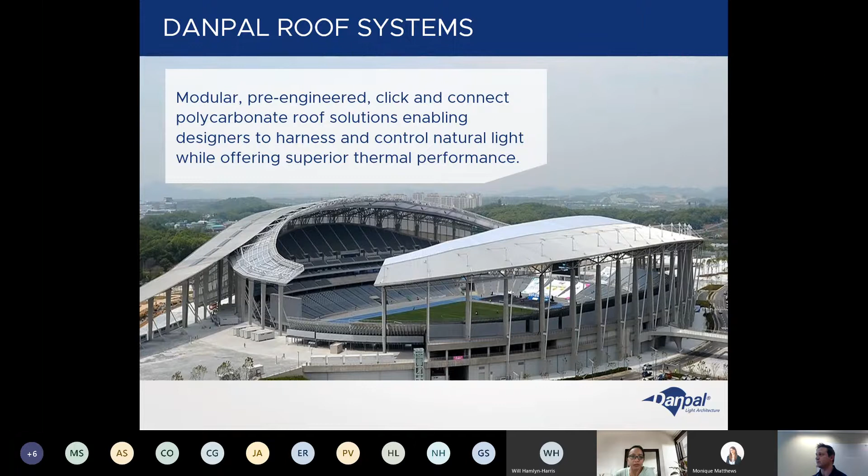I'll just move on. You'll see the photo there of a stadium. We do a wide range of projects, anything from super large projects like stadiums down through to awnings in backyards or pergolas of residences around Australia.

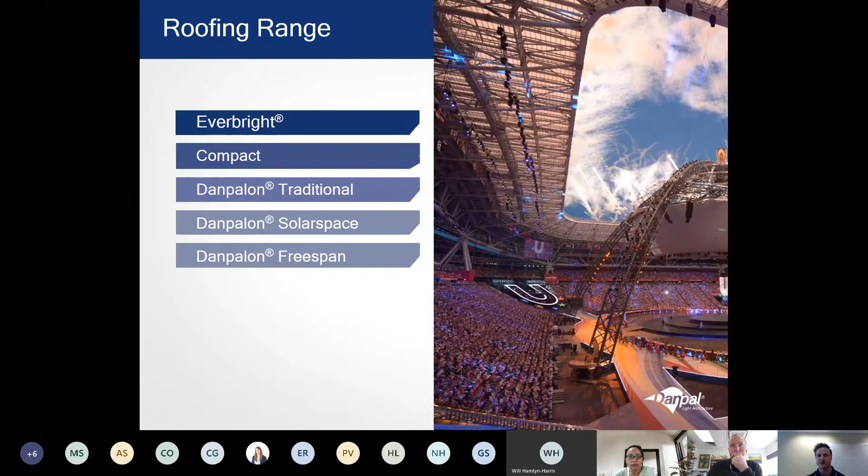Just a quick overview of the roofing range we have listed with yourselves. We've got a couple of products, really three very different solutions: Everbright, which is a tube system; Compact, which is a solid panel offering; and our Danpalon panels, which are the multi-cell extruded polycarbonate panels. There's a few different systems that go along with that panel to achieve various spans and aesthetics, and we'll go through that. The three we've listed with yourselves at this point: our traditional system, our Solarspace system, and our Freespan system.

Jumping straight into Everbright, you'll see from the render image that Everbright is a tubular system. It's an extruded tube, 100 mil wide by 75 mil thick, with 3 layers of polycarbonate through it, and is probably the strongest polycarbonate roofing system you'll be able to find. It's also used for walls, as you'll see in that photo to the right, but we'll cover walls and facades in a separate presentation.

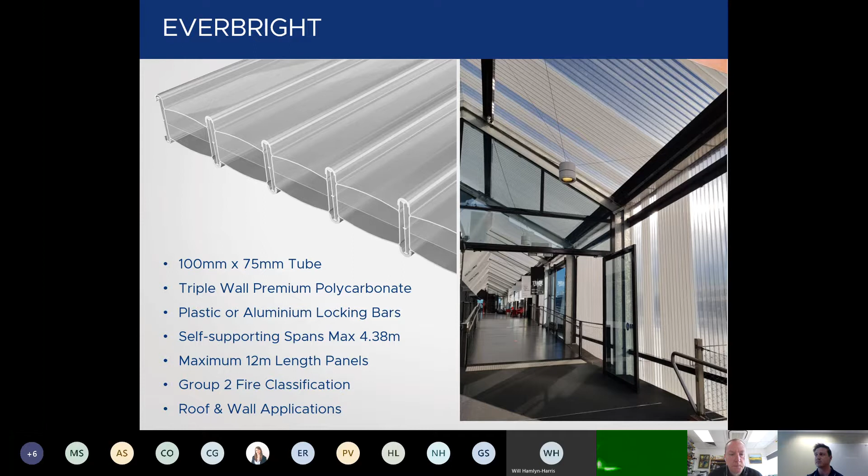What's unique about Everbright is that it doesn't use any visible or external framework or support. It uses what we call a locking bar that sits between each of the tubes, and that locking bar gives it the ability to span a certain distance depending on how many locking bars are in the configuration—anything from one aluminium locking bar, or even none, per 6 joins, through to 5 locking bars per 6 joins. We stock these tubes in 12-meter lengths. They're very rigid but can be curved. These achieve a Group 2 fire classification, and as mentioned, there are both roof and wall applications.

So just a quick look at the technical properties here.

You'll see the tube obviously just interlocks, and then there's a locking bar that sits in between that ensures the tubes are connected sufficiently to ensure they don't disengage. It's then simply fixed through that joining profile into the substructure at the various maximum span distances, which are in the span table to the bottom left.

Just quickly, we stock this product in four colors, and each color has its own light transmission as well as SHGC values. I'm sure you're familiar with SHGC, the solar heat gain coefficient, very common in glazing and windows. You can convert that U value, which is just below there, the thermal properties, a U value as standard.

We've got a few options to increase the thermal performance by inserting either what we call polycool inserts into each tube, or nanogel into one or both cells. You'll see that U value with 2 cells of nanogel down at 0.18 is incredibly good performance. In terms of an R value, that's the equivalent of 5.5 - an incredibly high performance in terms of the thermal aspect.

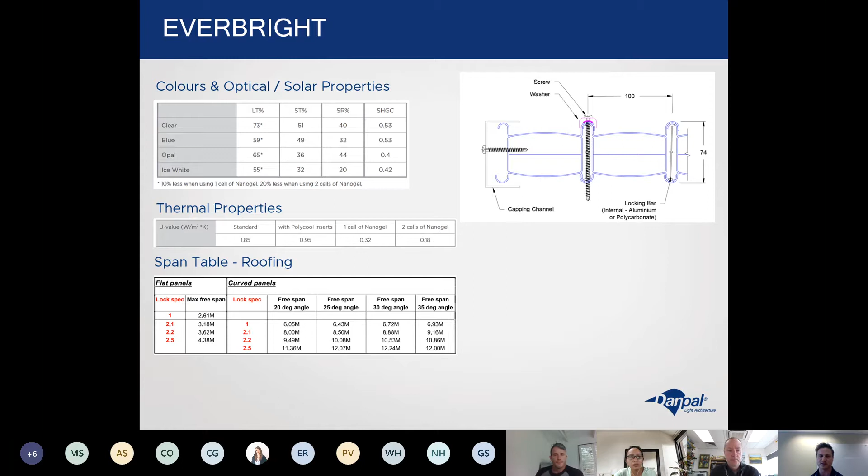Just a couple of photos so you can see what it looks like - obviously a very clean look. That photo on the left is from the Tasmania project, where it was all clear tubing. The ones that appear to be sort of opal or a little bit opalescent are actually filled with nanogel, and that was to achieve the appropriate thermal performance for that project.

You can see there in that awning sense, and the photo down the bottom is actually a covered outdoor learning area, which we'll see a lot of in schools. You'll see it's very minimal structure requirements, because the panel will span up to 4.38 meters in a flat sense.

Excuse me, Hein, just a question on that - are the panels trafficable?

They are, in terms of their ability to support the load. There is a standard, AS 1539 or AS 1563 I believe, which stipulates that any plastic or plastic-based product should be considered non-trafficable. So even though our system can support a trafficable load, really what you'd need to do is place a crawl board over the panels if you were going to access it. That crawl board would just sit over the panels and be supported by the internal structure. So it's a bit of a technicality, but as far as it physically being able to support somebody standing on it, or materials being placed on it, it is very rigid and can support loads.

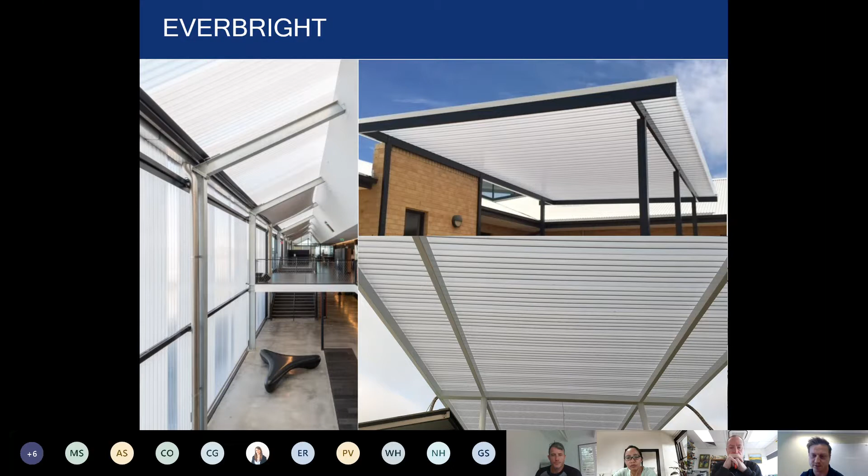The next system we have is Compact, so this is a solid polycarbonate panel. Obviously that offers that glass-like transparency. This offers probably the highest impact resistance, given that it is a solid polycarbonate panel. If you're not familiar with it, polycarbonate will offer impact resistance up to 250 times more than glass, and about 75 times more than acrylic materials.

We can achieve spans of up to 5.5 meters with this product. It entails using a structural glazing bar, or a free span bar as we call it, which you'll see on the next slide. We stock these in 12-meter lengths, but we can order them longer if required - so if you've got an awning or a roof that is 15 meters long, that's certainly something we can accommodate with a custom order. These achieve Group 1 fire classification.

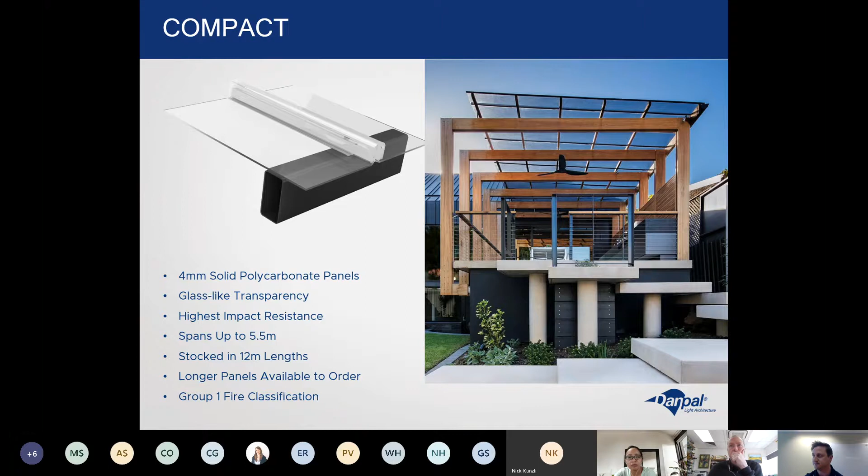And just some technical details there. So that just shows you the various spacer and glazing bar combinations. We'll obviously be able to provide these in our typical drawing set, but essentially what happens here is you've sort of got a system, the traditional up the top, that would tie into an existing or a substructure by others.

And then we've got other systems that will allow longer spans. So the glazing bar, you're getting a span of up to about 1600 millimeters. The structural glazing bar increases that to 2400, and with various size free span bars we can achieve up to 5.5 meters. Just some of the information there.

Obviously, being a solid clear panel, the U value is quite high. It's quite similar to glass in terms of its thermal performance, so a U value of 5.2. We recommend a slope of 5 degrees; the absolute minimum we would warrant is 3 degrees on this particular product.

We stock this in clear grey and reflective grey colours, and each of those colours has its associated SHGC and light transmission values, which will be available in the data sheets. I do have an optical and solar performance data sheet, which I can share with everybody straight away, that lists all the various colours. We have a list of colours that we offer from our library, essentially.

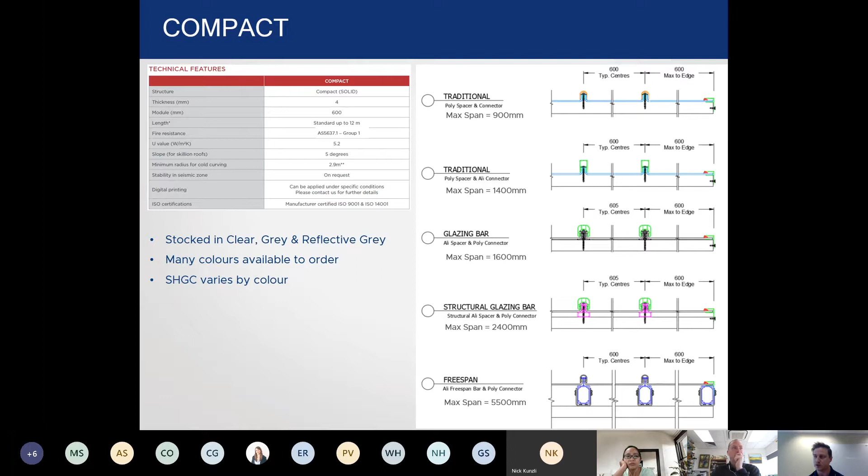So just moving on here again, just a couple of photos to show you what that looks like. We've got that curved application on the left there, using a free span bar, which minimizes any sort of other structure or purlins required. And then on the right hand side is basically just a rain screen for a town in WA called Manjimup.

The town wanted to protect their main shopping district from the weather. Obviously with the clear panel, it's still going to allow a fair bit of heat through, but it gives you that real clear and transparent effect.

Did anybody have any questions on that particular product?

Or again, with trafficability, there's a similar situation. You can support the loads by placing a crawl board on top, and that'll be supported by the connectors which hold the sheets together, and that eliminates any direct traffic onto the polycarbonate material itself.

Another reason you'd want to avoid standing on the polycarbonate directly is because you can scratch it, so certainly we wouldn't want people on dirty building sites, mud on their feet, climbing up and walking all over the roof, with stones on the bottom of their feet scratching the material. So while it can support that live load, we would advise against actually stepping directly on it anyway.

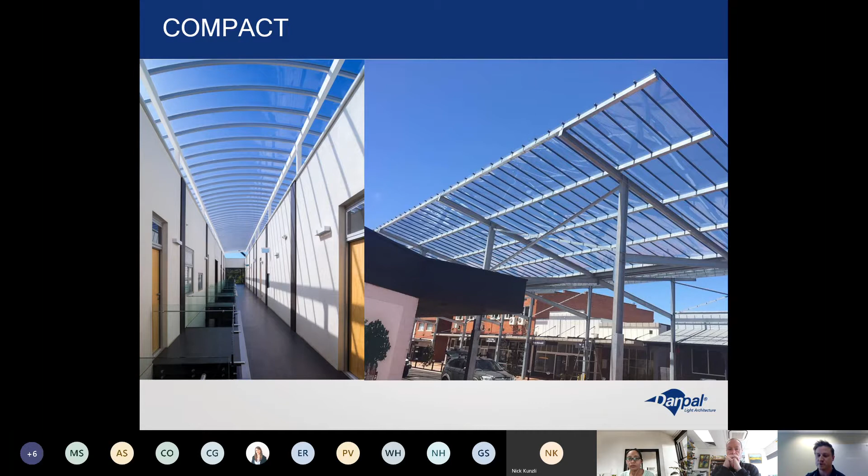All good to move on. I'll go to Danpal, as Will mentioned, that's what we were known for.

Danpal was distributed in Australia by various companies before Danpal, the parent company, set up shop here locally. About 3 or 4 years ago, Danpal, based in Israel, purchased 4 distributors in Australia - South Australia, New South Wales, Victoria and Queensland - and each of those became branches of Danpal Australia.

We're in New South Wales, we are the head office, and we have the majority of the stock holding, although each of those branches do have their own warehouse and hold some stock locally too.

So Danpal is the multi-cell or the extruded honeycomb panel, and basically these can be fixed straight down into a substructure that is designed by others, so either rafters or rafters and purlins appropriately spaced, in the sense of the traditional system. Or we offer structural systems in Solarspace and Freespan, which will really minimize the structural requirement of the substructure, which we'll go into more detail shortly.

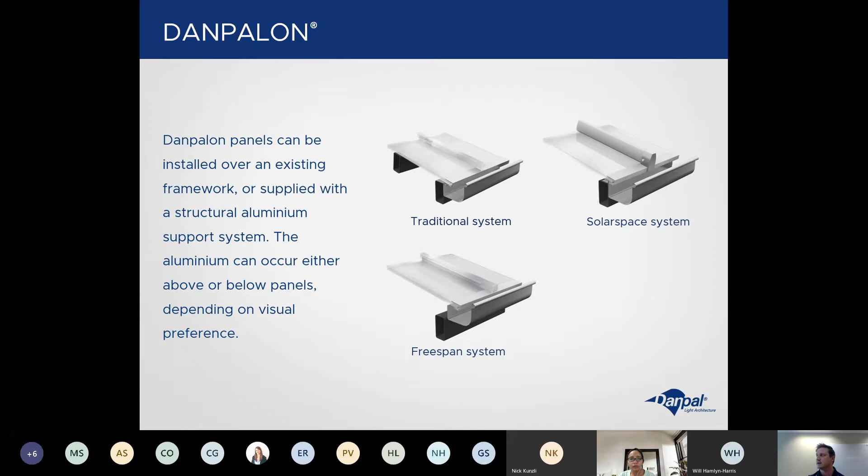So the traditional system, as you can see in the top left hand corner, is an extruded multi-cell product, so it doesn't offer the clarity or transparency that something like Compact, the solid panel, does, but it still allows light through, so it's still very translucent - anything from 80% translucency down to 0 depending on which colors are chosen.

It's available 8, 10, 12 and 16 mil thick as stocked. We also have 22 and 35 mil thick available to order. Again, these products are either multi-cell or honeycomb structured, which gives the panel a lot of structural integrity by itself.

The traditional system relies on a substructure, so it has a maximum span of 1.8 meters when using one of the aluminium connectors. In the bottom right corner, you'll see what we call a knee fastener, also called a panel retention clip, which holds the panels down to the substructure.

We stock these panels in 12-meter lengths, but we can supply longer lengths if required, probably up to a maximum of 34 meters. Because they're flexible, we essentially fold these panels into containers.

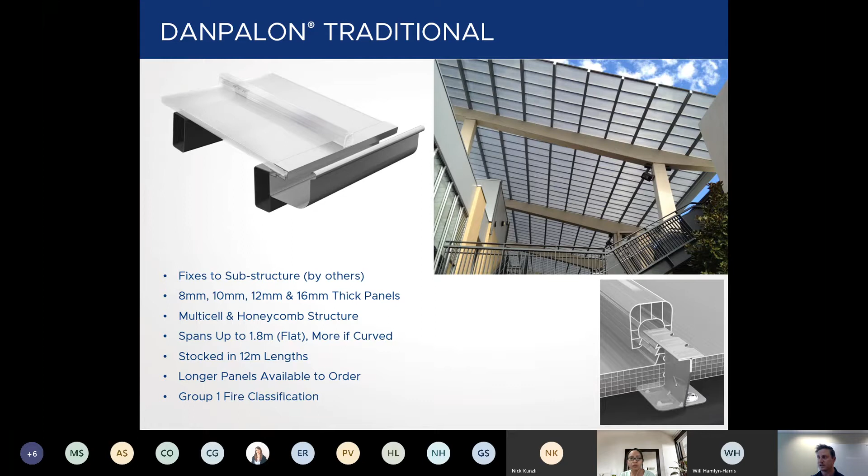This product also achieves a Group 1 fire classification, which is the best you can hope for, for any material tested to AS 5637. The traditional system, depending on which thickness of panel and which connector is used, will achieve various spans as shown.

That standing seam system was actually invented by Danpal back in 1982, when they first invented the Danpal standing seam roof system. Because it's click and connect, it allows for really rapid installation, a very cost-effective method of providing daylighting under a roof.

A massive range of colours are available, each with their own SHGC values and light transmission values. Because the product is slightly flexible, it can be cold curved on site. There's a slide later on with technical details on all the thermal values and cold curving radiuses for Danpal material.

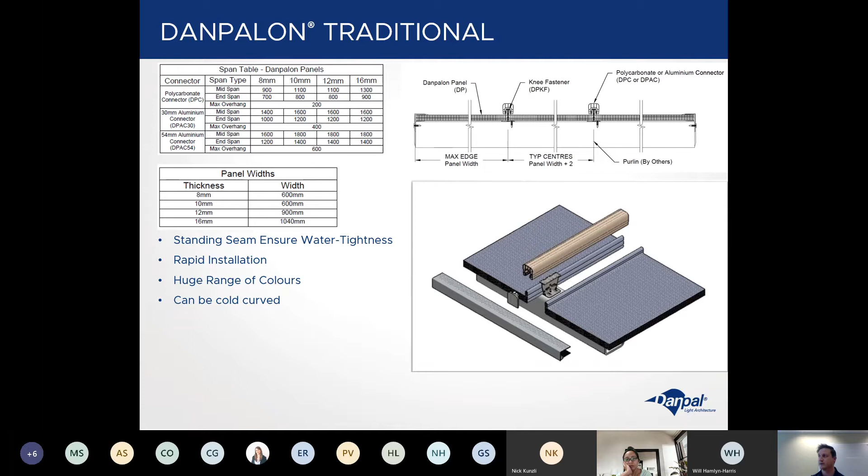Moving on to solar space. Solar space is a structural roof system, so it has very minimal substructure requirements.

The structure is provided by this aluminium connector which sits above the panels, which means that from below it's a very seamless or flat appearance. Depending on which colours are selected, you will be able to see a shadow through of that connector. But it uses the same panels as the traditional system and can offer spans of up to 6.1 meters.

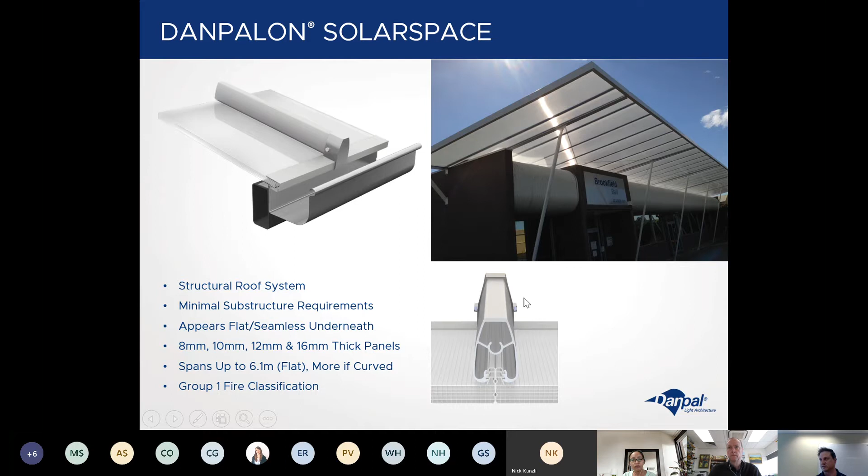The connector comes in various sizes - this is a streamline connector, and then we've got a slightly more square option which ranges in height from 40 mil through to 150 mil, and that's what allows us to achieve longer spans. Because we're using the same panel, it also achieves that Group 1 fire classification.

Just a couple of examples of what that looks like. Particularly in this curved application, you will be able to achieve longer spans than the maximum I mentioned before, simply because as soon as you create an arch, you increase that structural capacity, and it can also be cold bent.

We can actually roll form the connectors to suit various curves. In this awning application, you can see it's allowing the system to span from that wall through to the supports provided at the end.

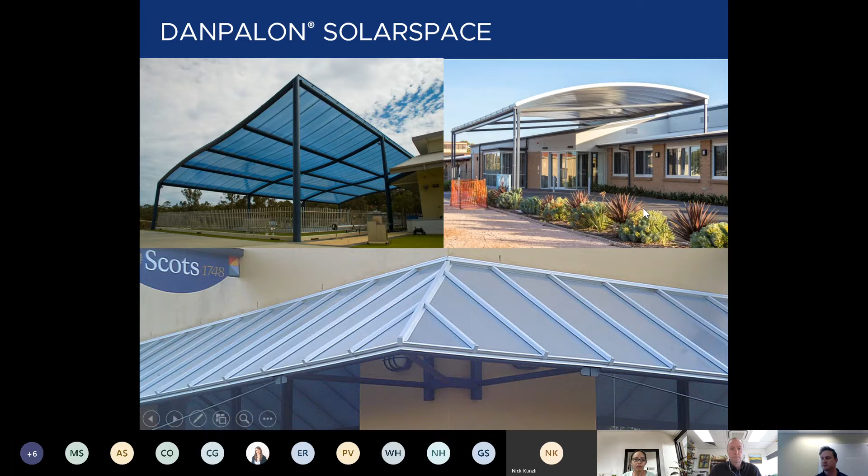Just a couple more photos, showing you some of the colours available to order, and again just showing you that very seamless look from below.

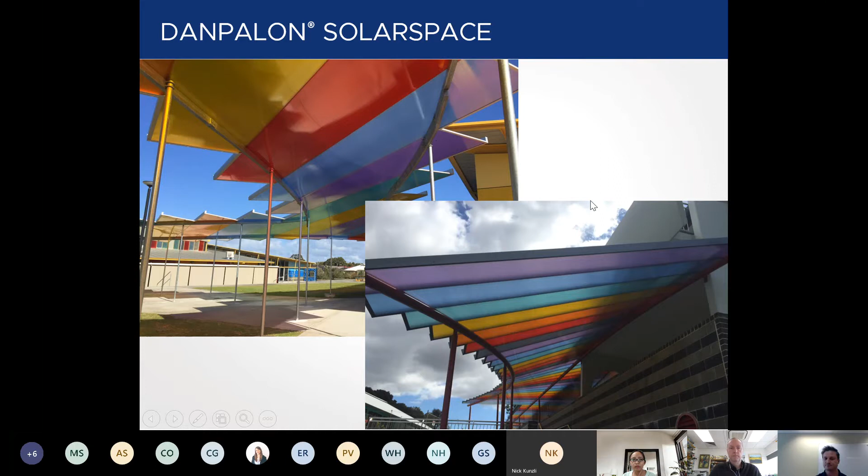Lastly, the free span system. This system uses a proprietary bar with a T section, which we call a free span bar. Essentially this is also a structural system - it provides support for these panels through the span from below.

This gives the appearance of a rafter at each panel joint, with very little substructure requirements. It's also available in sizes from 50 mil through to 150 mil, which allows us to achieve spans of up to 9.6 meters in a flat roof scenario, and much more if curved.

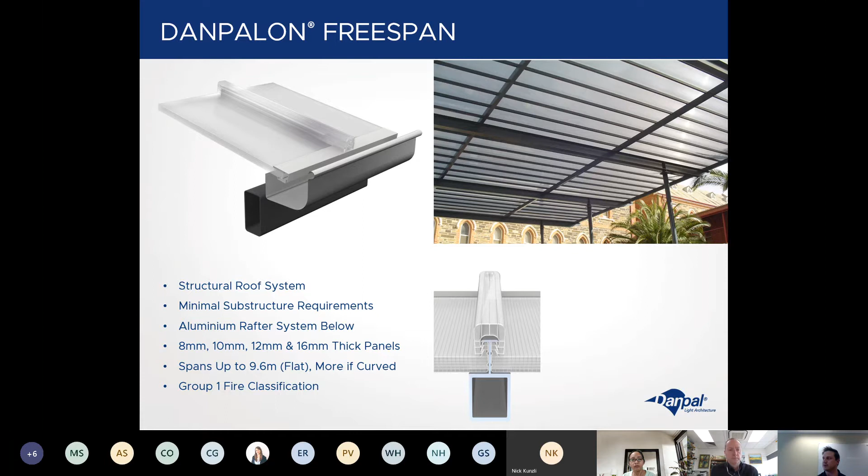The curving depends on what radius the curve is at, so feel free to get in touch if there's a question about that. Again, using those same Danpal panels as mentioned earlier. Just a couple of photos here showing you what that would look like.

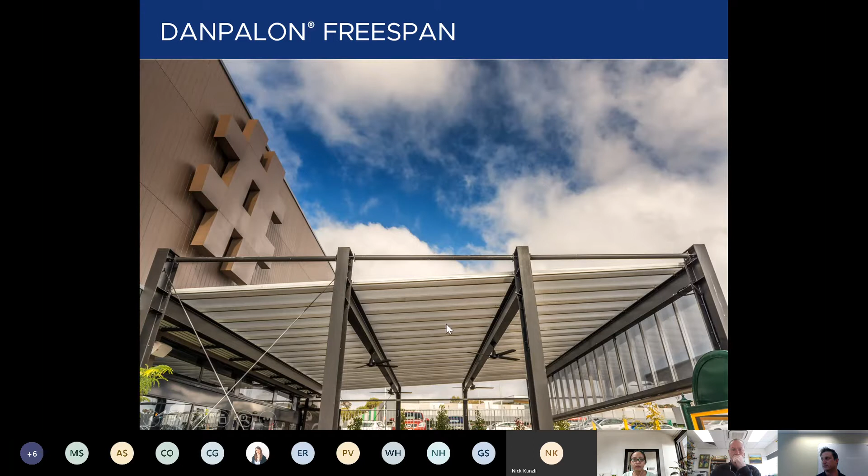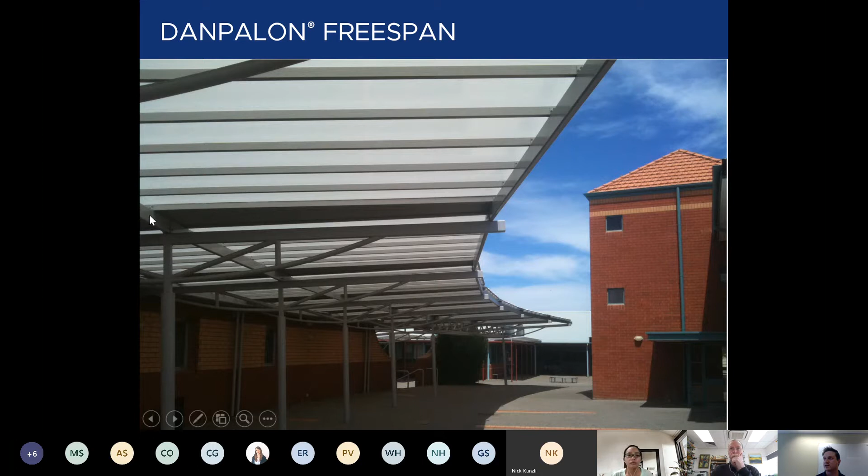Incidentally, this was returned back down here with the compact solution to create this sort of screen at the end here, but we've got the Danpal running through the roof with the free span bar. You can clearly see these free span bars able to span between this edge beam and the beam provided here, and again at the other edge.

This is a school project here in Sydney. This is a train station in Brisbane, I believe. Just showing you some of the ability to create interesting curves, and architects will, as you know, come up with a fair few interesting designs. So we do have the capacity to assist and engineer some custom solutions to help them achieve the visual or aesthetic they were hoping to achieve.

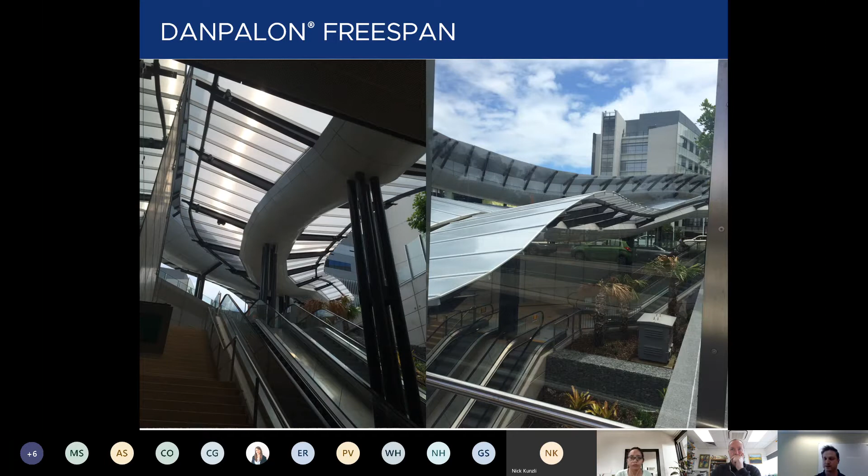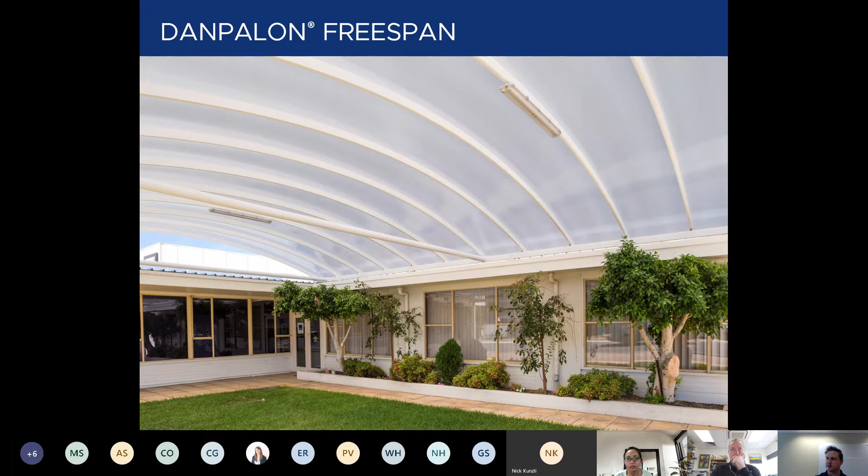Again, here you can see these spans in a curved scenario. Similarly here, this was for an aged care or daycare facility, I think, where these bars have been curved, and so can achieve a much further span. In this case, I think the span was around about 10 to 11 meters.

As I mentioned, just some information on those various options around solar space and free span. Showing you the various spans available or that can be achieved, and then down the bottom, the width of those panels versus...

...the cold bending radius, and also the U values achieved. So we provide the standard U value here, which is the actual U value of the panel itself. And then the NFRC U value is typically what would be required to be utilized in a Section J calculation, because that is a value that takes the whole system into effect, including all the aluminium componentry.

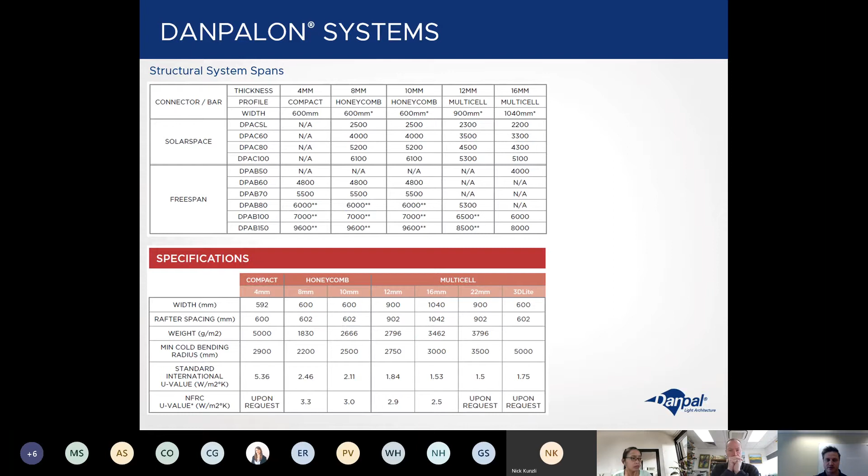So I think I'm just about on the half hour now, so I just wanted to mention really quickly, when we use these roofing systems, there's really two main considerations as to when they can be used and when they can't.

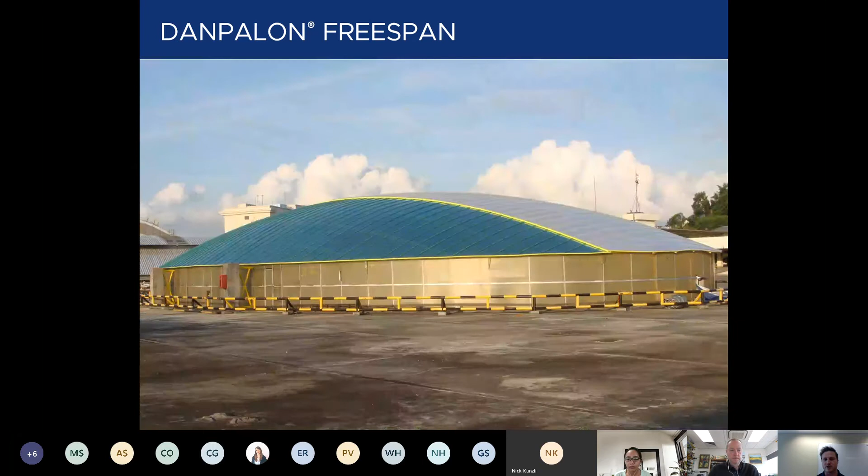If it's going to be part of the building envelope, that's when we would have to assess the type of fire resisting construction required for that building. I want to go back to this aquatic center as an example - these aquatic centers would have had to have been a type C construction for this to be deemed to satisfy application. If it was a type A or type B building, to use the roofing systems as part of the building envelope, a performance solution would be required, a fire performance solution.

So we're in the process of developing some of those as examples, so that we can share them with architects and fire engineers, because obviously we know there's been some changes recently in the verification methods, and we'll be able to release some more information on that shortly.

Then in the other scenario, when you're using the roofing material as an awning, sunshade or canopy, it doesn't have to be non-combustible. There is a section C 1.14 of the BCA which allows materials to be combustible, but obviously there's a few things that need to be satisfied in terms of the certifier or the fire engineer, and that's where those group number classifications come into play.

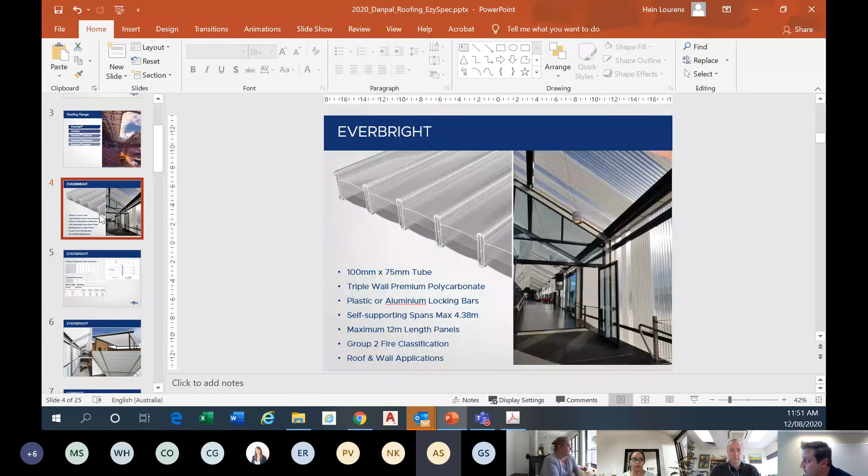And because it can get unsightly sometimes, especially if it's a clear or translucent system. But we don't really experience that too much. Our extruded surface is antibacterial. What you'll find is typically mosses and things will grow on polycarbonate that hasn't been treated effectively to withstand UV. The UV layer breaks down over time, and that enables organic compounds or biological organisms to grow, like moss.

That's the biggest difference between what we produce and any of our competitors, or even some of the stuff you might find at a Bunnings - we've got accelerated age tests that show this, which we can share with you. Essentially, we would only experience a similar level of UV protection breakdown after 30 years, what the stuff you might find at Bunnings experiences after about 5 years.

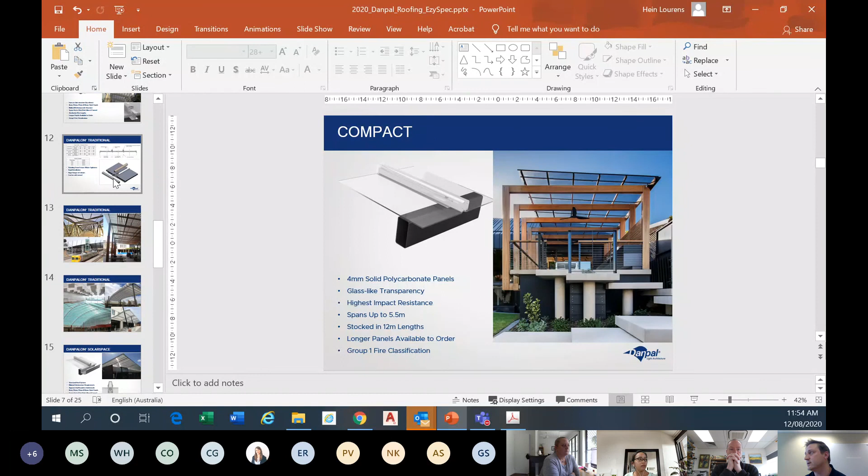As far as the standing seam, I know you asked about that - I just wanted to show you here. We don't find... where is my cross section? Here we go, I'll zoom right in on that so you can see.

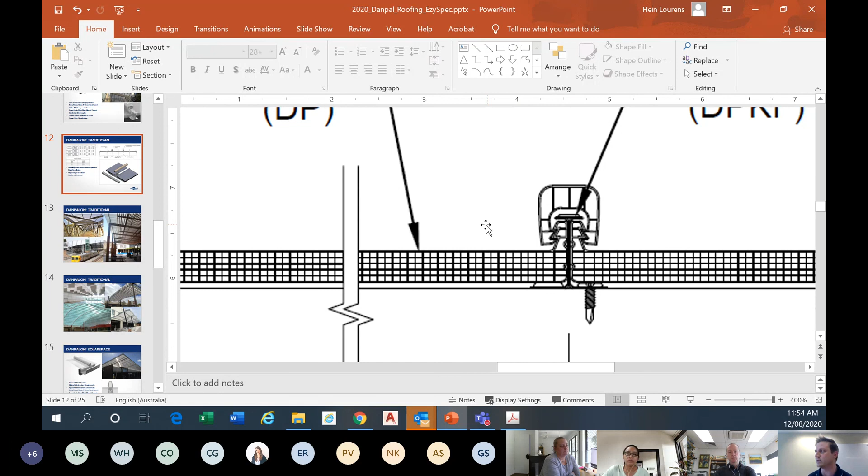It's going to be pixelated, unfortunately, but this break here - because we provide this air gap - that stops the capillary action of water drawing up, and that's really what prevents any water from getting anywhere close to this. Obviously if you're going to submerge this in a pool of water, that's a different story.

This area here, you may find debris collecting if it's at a very, very low pitch, something like 1 or 2 degrees. We don't recommend installing at such a low pitch, but if it is necessary, we would advise the installer to seal this once the installation is complete - provide a bead of sealant here just to prevent anything from getting in underneath there.

No drama. Did that answer the question? I hope so. That's fine. Okay, cool. That's all I had. No dramas. Anybody else or any other questions?